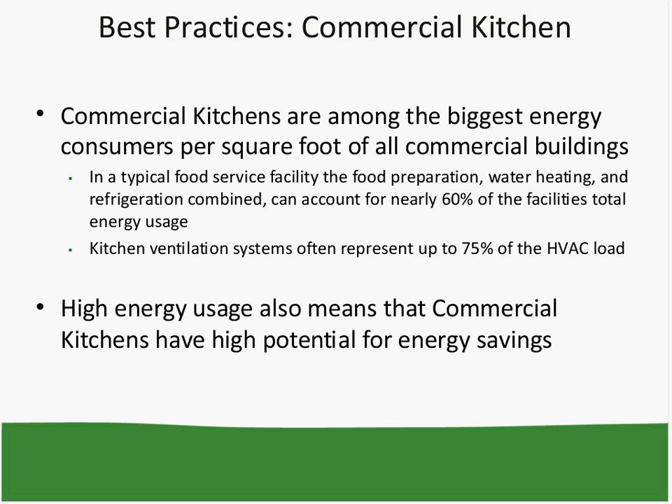Commercial kitchens tend to be pretty big energy hogs, with multiple appliances and dishwashers and high ventilation requirements. Most commercial kitchens are part of a larger facility, like a restaurant or cafeteria, so we'll also be discussing ways to save energy in the entire facility, such as lighting upgrades.

Let's talk about some typical equipment found in a commercial kitchen. Older style food steamers use a lot of energy. Newer connectionless, or boilerless, steamers don't require an external boiler to generate required steam, and therefore also eliminate the additional need for boiler maintenance. The energy program provides special incentives to businesses to install the new energy efficient steamers.

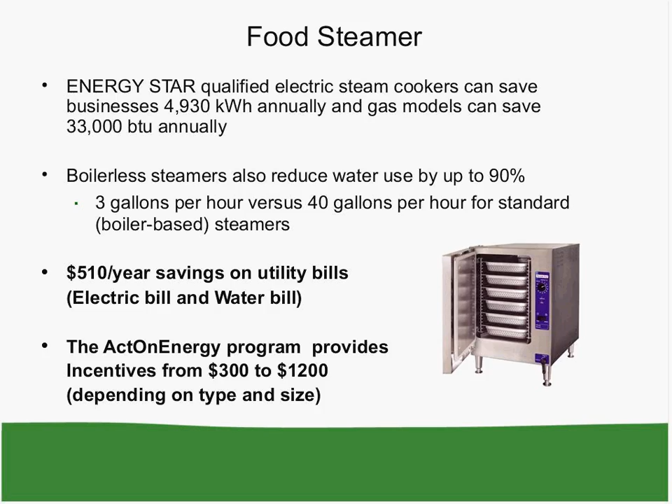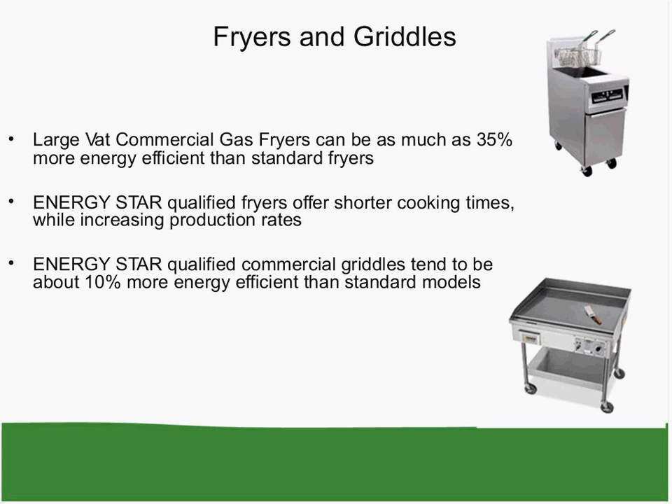Obviously some of the most common kitchen appliances are fryers and griddles. Some newer equipment shows substantial improvements in actual equipment design, making them far more energy efficient, such as with gas fryers. Other equipment realizes more modest energy savings. Some of the latest equipment can generate shorter cooking times, which is an advantage in any commercial kitchen.

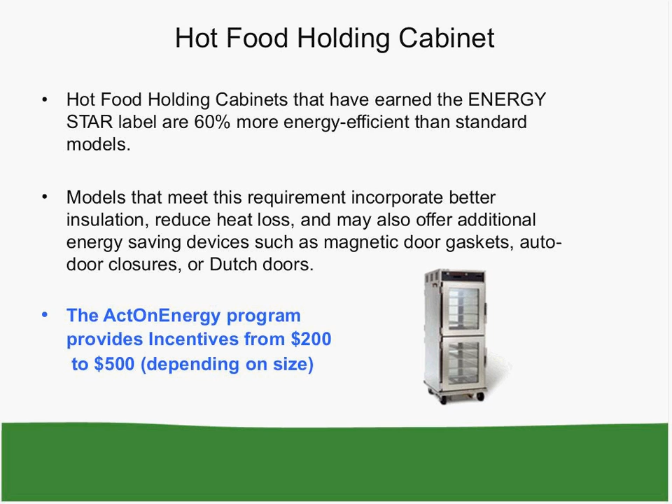Holding cabinets are certainly typical equipment in large restaurants and banquet and cafeteria food service facilities. Newer models can be as much as 60% more efficient than the units currently being used. An advantage of the energy efficient models is the improved insulation of the cabinet, which offers better temperature uniformity throughout the entire cabinet, from top to bottom.

New dishwashers can save water and energy, and you can save on the energy used to heat the water for cleaning. You can also save money on your gas bill and your water bill, that's the point I'm trying to make. It probably goes without saying, but a good common sense way to save energy is to run full dishwasher loads, not part loads. Dishwashers use the same amount of energy whether they're full or half empty.

I'm referring to the Energy Star list quite a bit during the presentation. I'd like to point out that most of the kitchen equipment and appliances that the energy program provides incentives for must be Energy Star qualified for our eligibility criteria. As a utility company and not an appliance testing company, we don't have the ability to verify the energy savings capacity of any commercial kitchen appliances, so we use the Energy Star qualified list for our equipment selection.

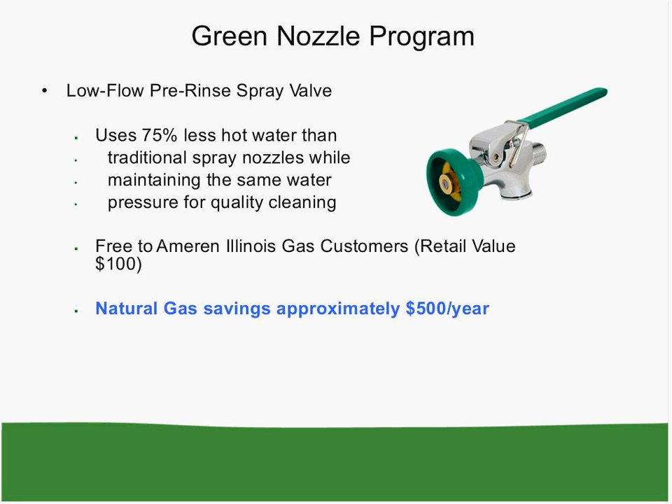Also look at the customer case studies tab on our Act on Energy website to see how some actual restaurant owners are saving by using these nozzles. I don't want to name names, but the initials are Hometown Buffet. So far, to date, we have actually provided nearly 1,000 green nozzles to Ameren Illinois customers, the Ameren gas customers.

When kitchen exhaust fans are constantly running, they will exhaust conditioned air even if nothing is cooking on the grill. Obviously this wastes energy, not only by running the fans, but by getting the conditioned air out of the building. It costs money to heat or cool the air brought into the space, so it's wasteful to unnecessarily draw that air out of the building.

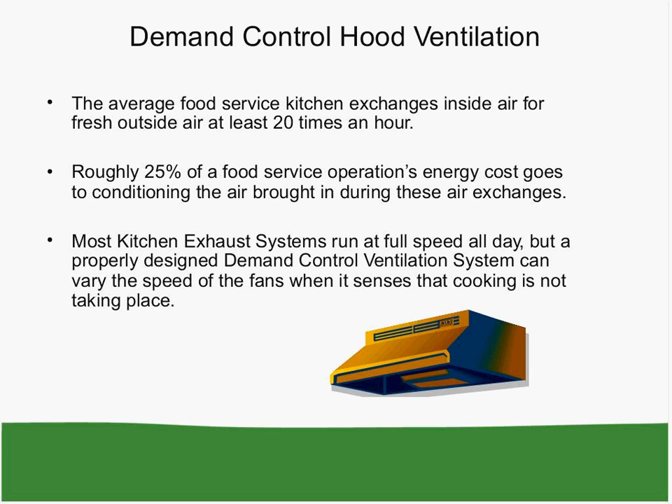Calculations for kitchen exhaust control systems will typically determine a custom application, not a standard application. Just to note, if you have a system like this that you're considering, you'll want to go through our custom program and criteria.

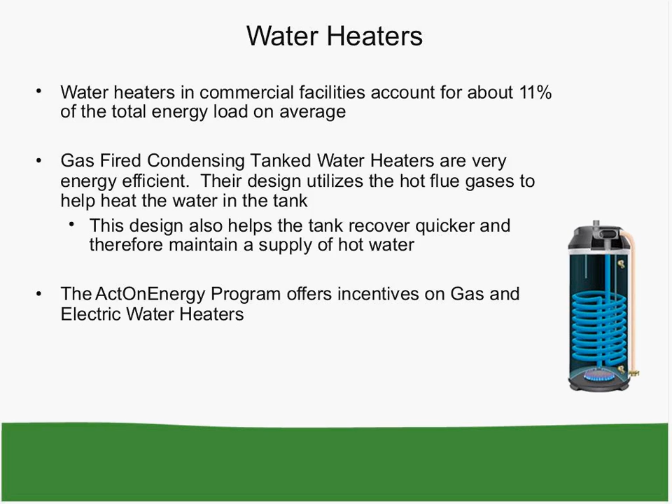The machine that is becoming more popular is the tankless water heater, which is intended to provide a continuous flow of hot water so you never run out. Tankless heaters, though, are often not a good fit for commercial kitchens because of limited flow capacity, since these often need higher volumes of water. So they're better suited for commercial buildings or offices that have intermittent demand for hot water.

Our program, at the time anyway, has very good incentives on tankless water heaters, although I've been told recently that the incentive for those water heaters needs to be substantially reduced. So if you're considering something like this, you may need to act very soon.

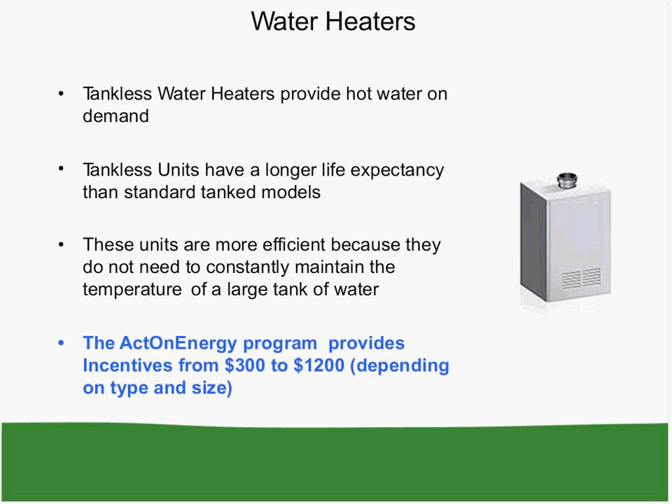Almost all commercial kitchens have some solid door freezers and possibly glass door freezers in their facility. While it seems like refrigerators and freezers last forever, the older models are terribly inefficient. A gap or leak around a door on a freezer not only wastes energy, but it can have an effect on the food inside the refrigerator or freezer.

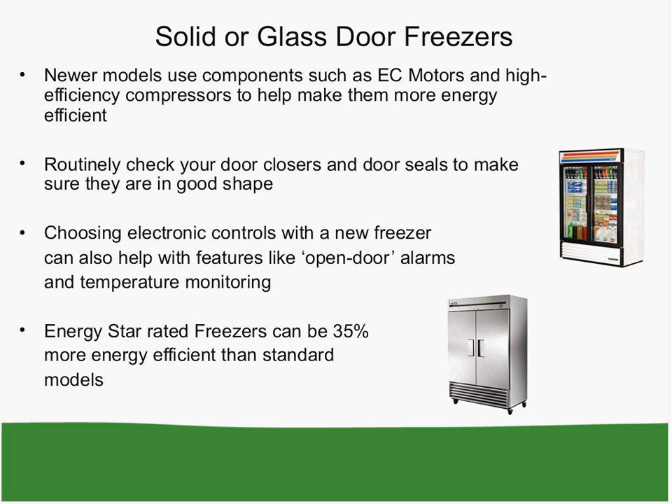Kitchens with cafeteria-style serving areas will have top coolers and maybe even some doored refrigerator cases. These units have several small fans for serving cold air. A typical shaded pole motor for this type of equipment uses approximately 50 watts, while an electronically commutated motor will only use 18 watts. While this doesn't seem like much savings, there are lots and lots of these motors in a typical stretch of refrigerated cases, so they add up quickly.

They are not expensive pieces of equipment, so payback on them is very good, typically 2 years. Add in the incentive from the energy program, and they become very affordable. They're actually pretty easy to install.

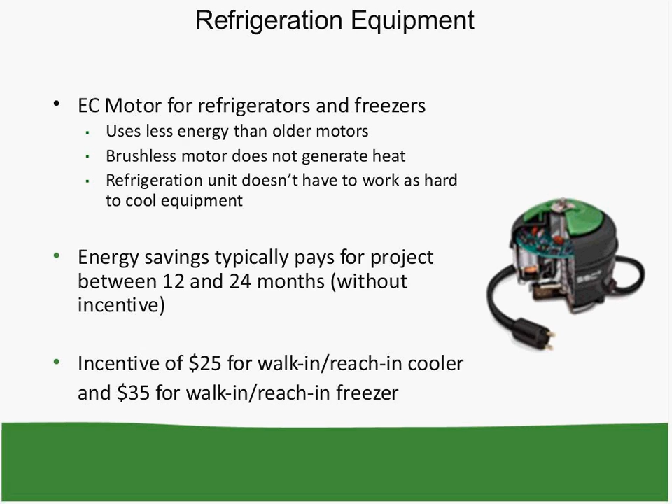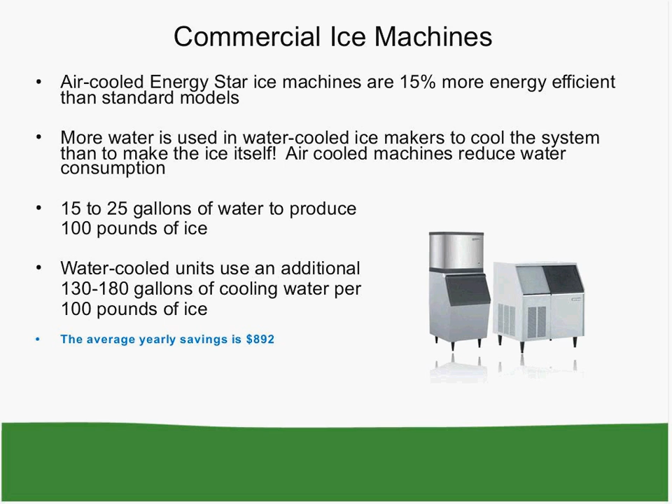Older ice machines used water-cooled refrigeration equipment that wasted electricity and water. Obviously, we are not the water company, but we do believe in conserving all natural resources, and old ice machines can waste a substantial amount of water. The benefit to the newer machines is that they seem much quieter than the old units, which could be pretty noisy.

There's also an incentive for other types of equipment that may be found in commercial kitchens, like automatic door closers, for tune-ups on refrigeration equipment. We all know that sometimes those big walk-in cooler doors don't close all the way, so they have a gizmo that pulls the door closed tight. It definitely saves some energy there. Check actonenergy.com for more information on this type of equipment.

In the commercial kitchen, there's also some common sense ways to save energy. As simple as keeping appliances clean can help them function at peak efficiency. An inexpensive way to save energy is to use motion sensors in rooms that may have intermittent occupancy, so you don't have to worry about whether the last person out left the lights on. Also, most people feel that saving energy is a good thing and are happy to be part of a company's initiative to conserve natural resources. So letting employees know about ways they can help save energy is typically a positive thing.

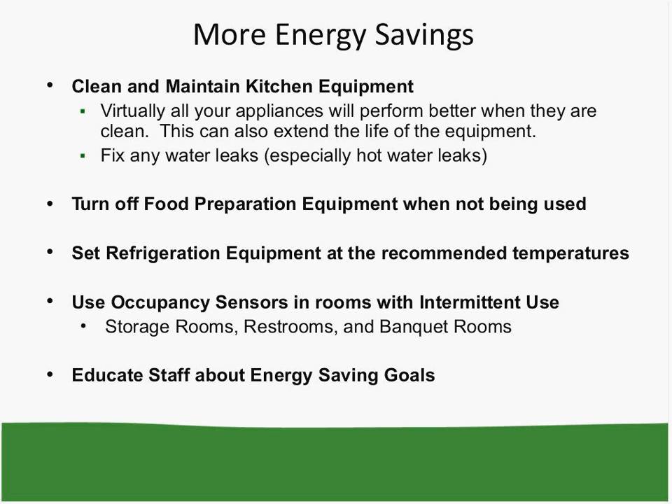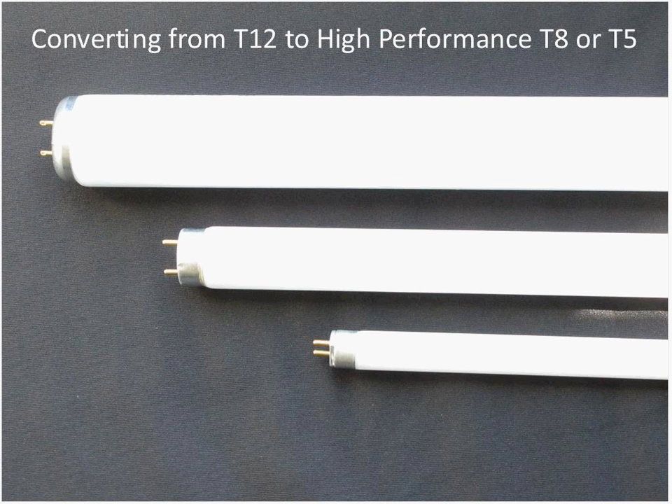You may already be familiar with the terminology for fluorescent lamps, but let's quickly review since we throw these around so much. To tell whether you have T12 lighting, look at the fluorescent tube and the little number. The number after the T stands for eighths of an inch the bulb is in diameter. So a T12 is 1.5 inches in diameter, or 12/8. If the tube is 8/8, that's a T8. And if it's 5/8 in diameter, then it's a T5.

T12s use more energy than T8s and T5s per amount of light they produce. T8s and T5s are far more energy efficient — you get much more light for the same amount of energy used.

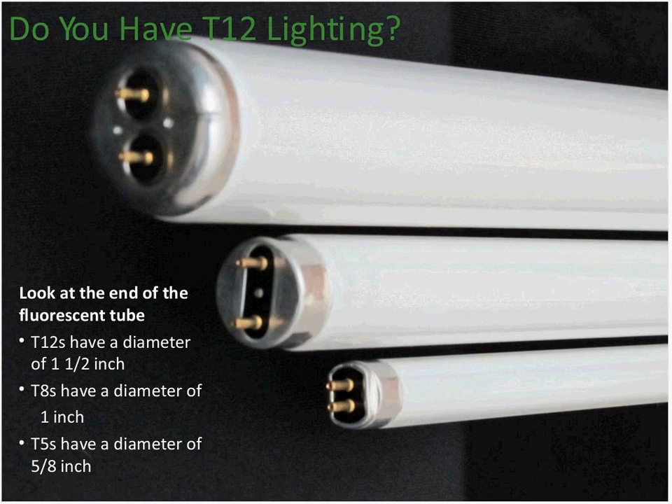An update: your T12 lighting is affected by the 2007 Energy Independence and Security Act, which increased the standards for T12 lighting. This means most current T12 lamps will no longer be manufactured as of July 2012, which was a couple months ago. The T8s will become the new standard for businesses.

Other ways to take advantage of the energy program: some fixtures can be retrofitted by changing the lamps and ballasts while using the same fixture. Another option is to put in new fixtures, which are typically more efficient at transmitting light. They have better reflectors and things like that, and the new T8 and T5 lamps are brighter, helping reduce the number of lamps needed in fixtures to save more energy.

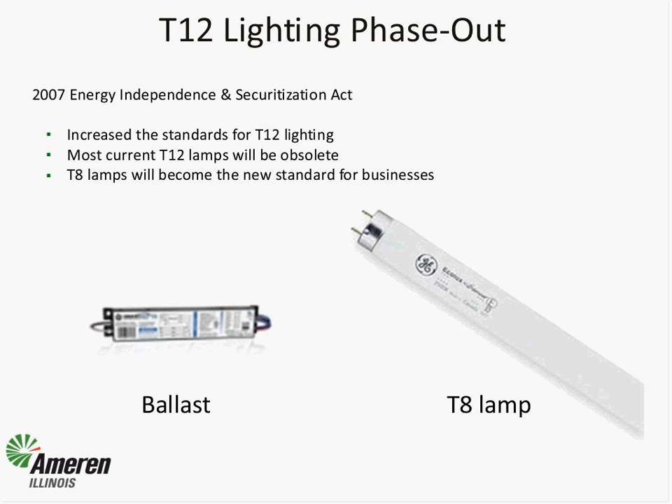Overlooked energy saver: exit signs have several benefits. They are inexpensive to purchase, about $35, and use only a fraction of the energy of a typical incandescent exit sign, about $3 for an LED sign versus $35 a year for the incandescent style. They're on 24/7, all day long, all year long, and LED lamps last longer than standard, so you're not replacing bulbs as often.

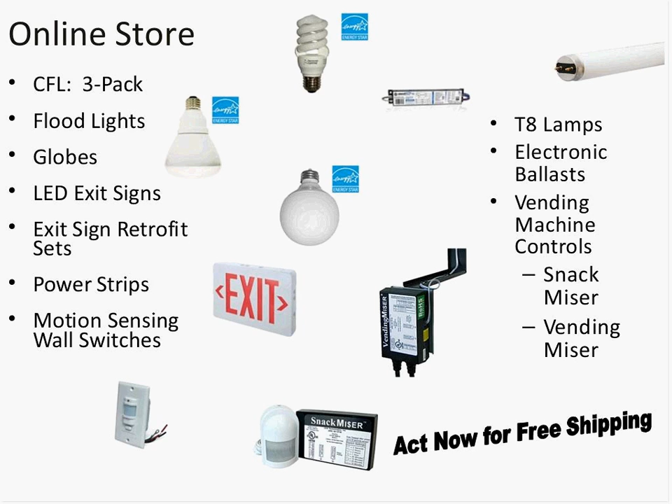Okay... I think there are too many buttons here. I think I may have messed up my slide. Let's try one more time. Okay, here, let's see what happens.

The ActOnEnergy initiative helps businesses use less energy and save more money. The ActOnEnergy program includes electric and gas incentives, where the incentive is paid to you after you complete the project.

With custom, all custom projects require approval. Standard projects giving less than $10,000 in incentives do not require pre-approval. So if you have a lighting project where it's only going to be a couple dollars in incentives, you don't need pre-approval. However, if you have a custom project, maybe LED lighting or something special, you do need to get pre-approval.